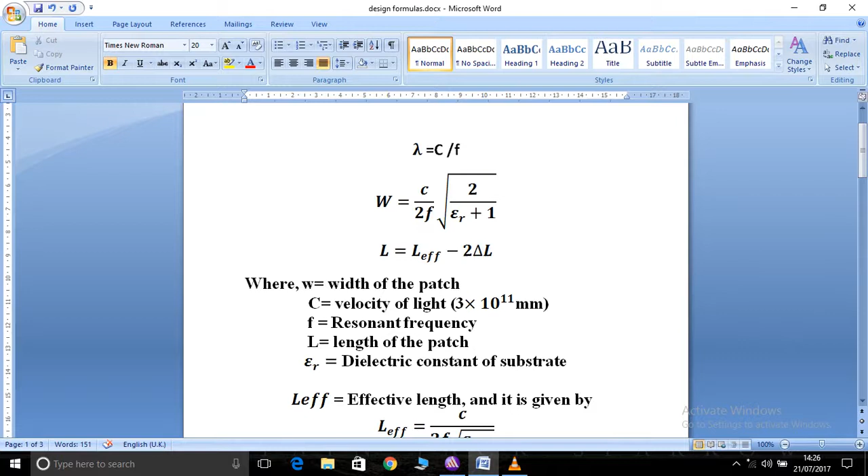Step number two is the width of the patch, where W is equal to c by 2f root 2 by epsilon r plus 1, where epsilon r is the relative permittivity of the material that you have chosen. Step number 3 is the length of the patch, where L is equal to effective length minus 2 del L, where del L is the extension length.

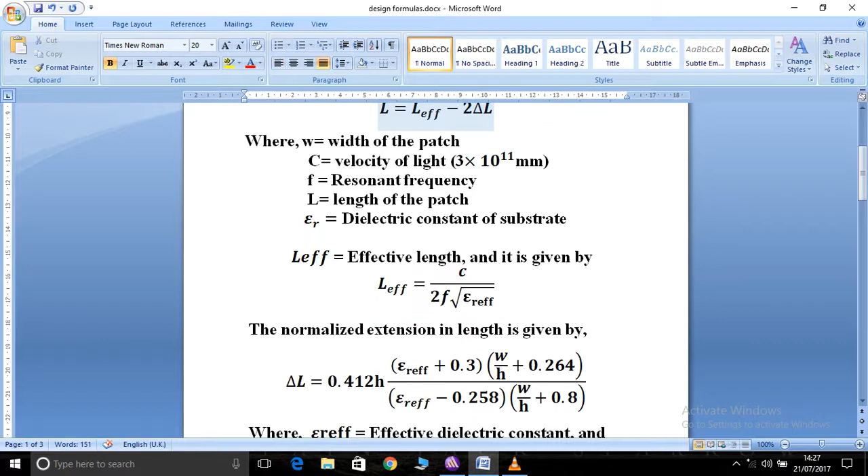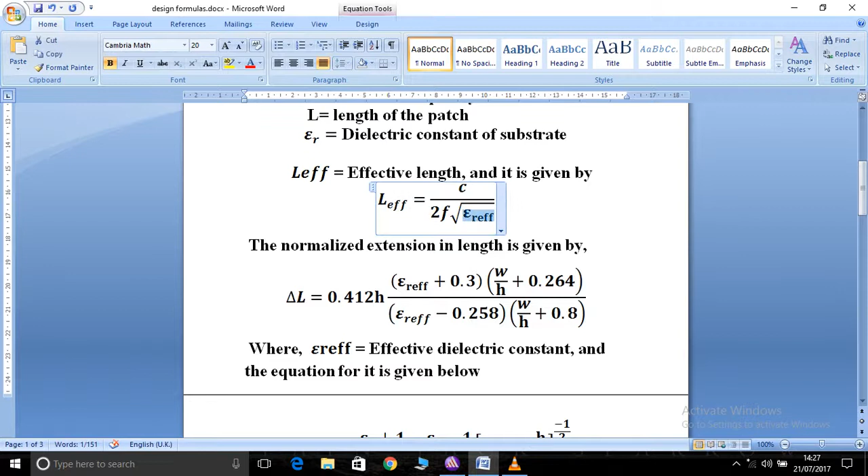Since we do not know these two, we have separate formulas for them, where L effective is equal to c divided by 2f root epsilon reff, where epsilon reff stands for effective dielectric constant. We do not know this either, so we have another formula for epsilon reff, where epsilon r stands for the same relative permittivity, h stands for the thickness of the material that you have chosen, and W stands for the width of the patch.

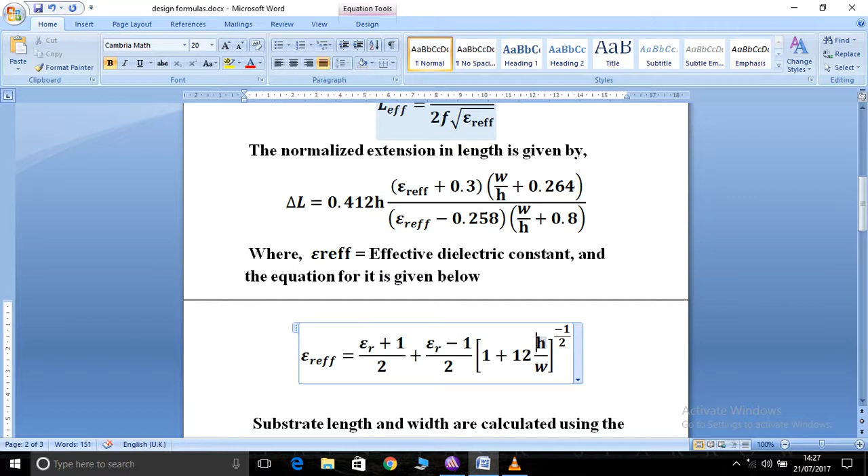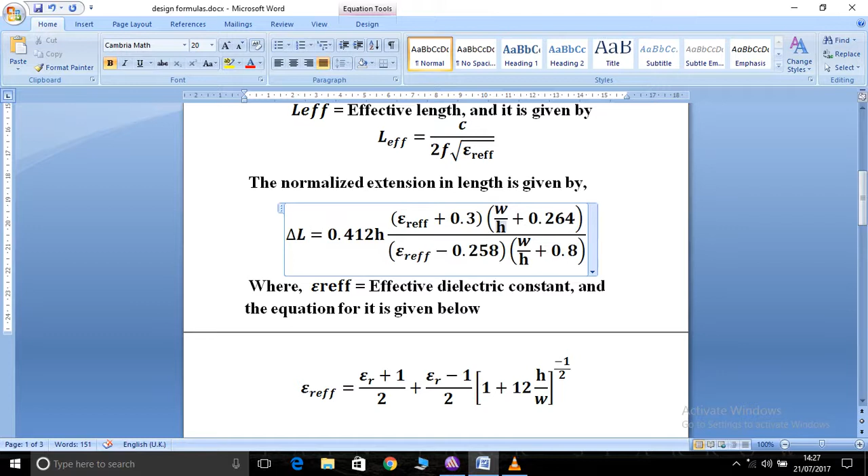And the next thing is del L, that is the normalized extension in length. For this we have a separate formula, using the epsilon reff we have found, where W is the width of the patch and h is the thickness of the material. Okay, so we have found the length and width of the patch.

Next thing is substrate length and width. In order to find them, these are the two equations that we are going to use, where Lg is the substrate length or ground length, equal to L plus 6h, where L stands for the length of the patch. Here h does not represent the thickness; for h we have a separate formula: h is equal to 0.0606 lambda divided by root epsilon r. We already have a formula for lambda from step number one, so that can be used here.

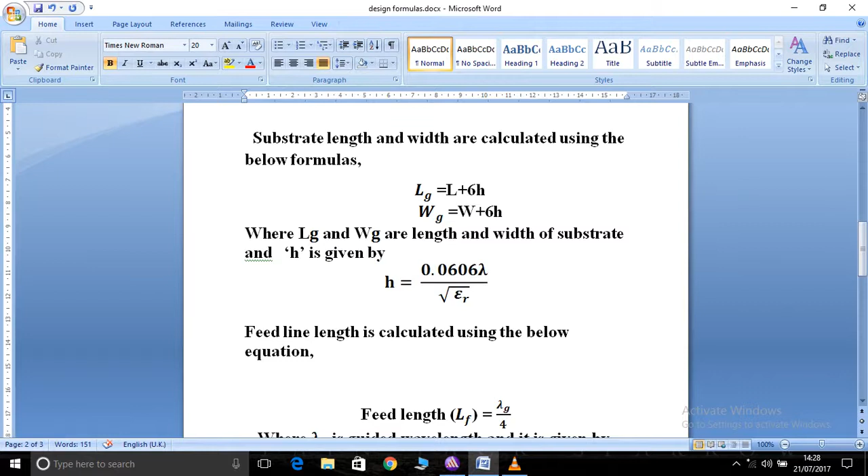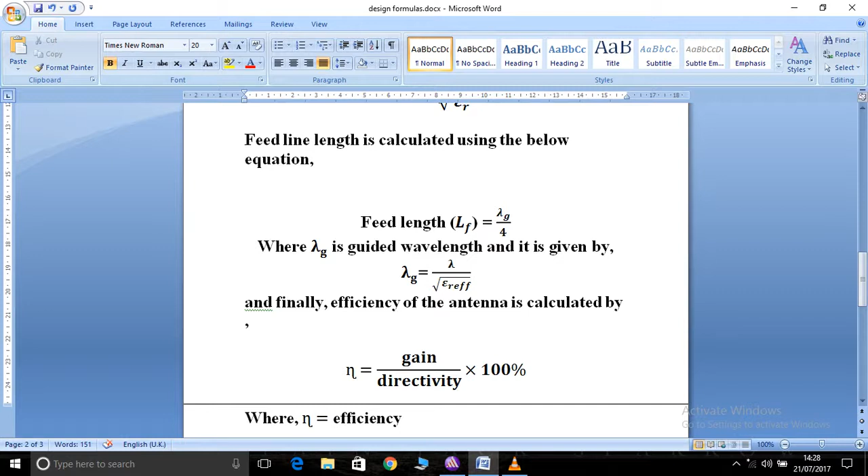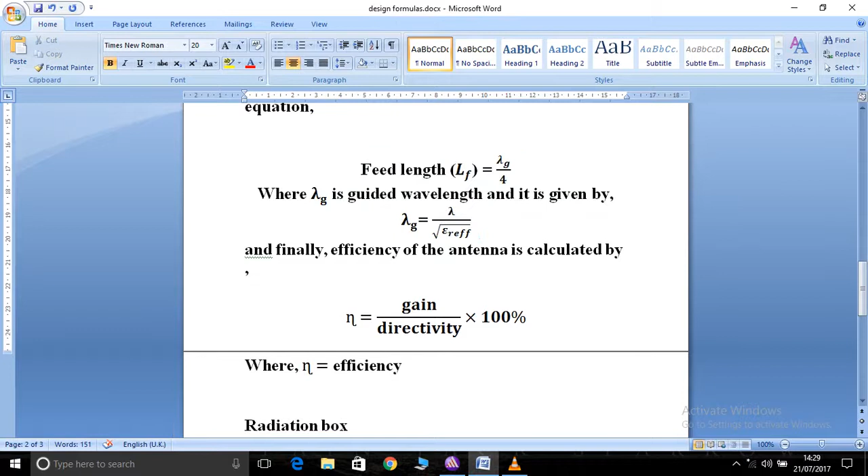And the next is feed length, that is the transmission line, equal to lambda g by 4, where lambda g stands for guided wavelength. For guided wavelength we have a separate formula: lambda g is equal to lambda divided by root epsilon reff. We have already found epsilon reff, so we need not worry. So this is the feed length, and for the feed width you can take half of the feed length. Next, these are the equations for the radiation box: axis position, length, width, height.

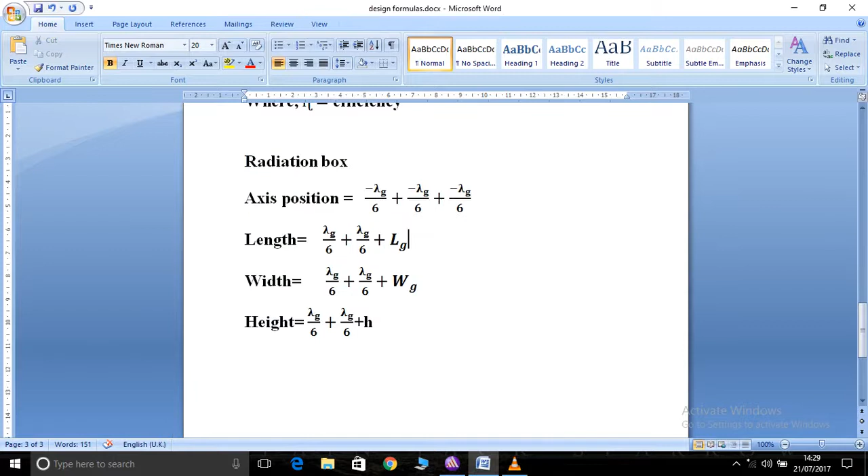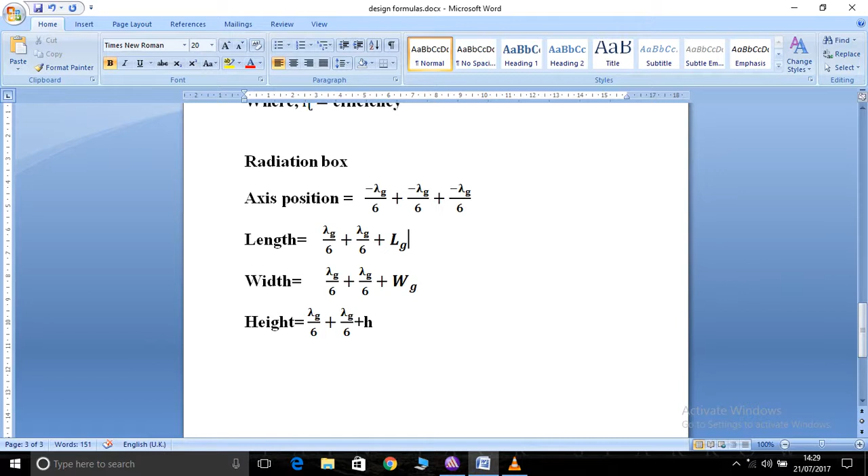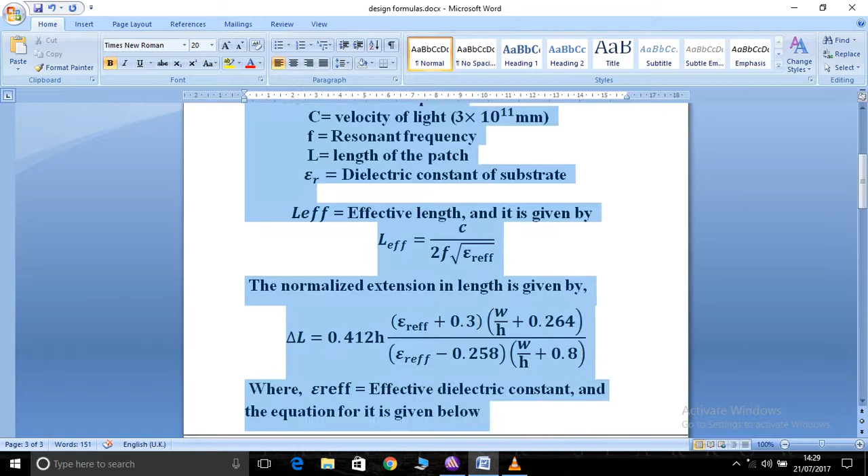For length alone it is lambda g by 6 plus lambda g by 6 plus Lg, where Lg is substrate length. And for width alone, instead of Lg we'll be replacing with Wg, that is width of the substrate, and for height, instead of Lg and Wg you will be replacing with H, that is thickness of the material. And that's all. These are the standard equations that are being used in order to design a microstrip patch antenna. For any design you can use these design equations.

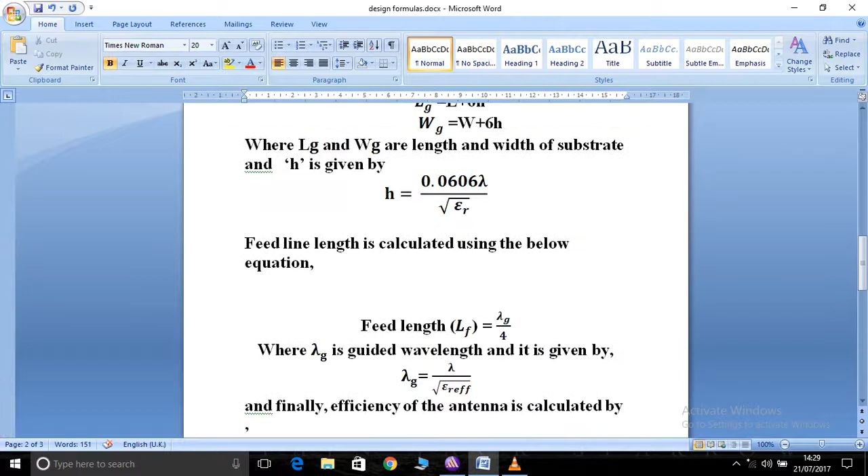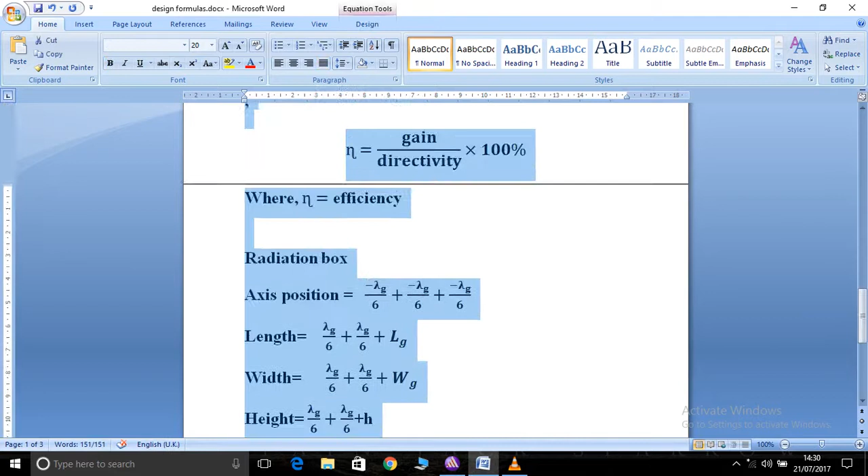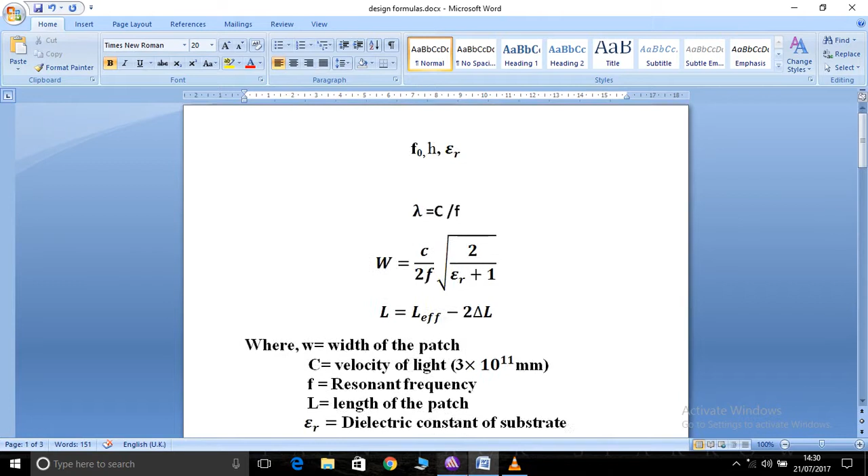So with a design example, I'll show you whether the antenna is resonating at a particular frequency or not. And nowadays the antennas that are being used practically should be of a miniature size. So I'll be designing an antenna at 15 gigahertz, so that we'll have a miniature size, that is 0.8 centimeter. Okay, I have already designed that antenna. I'll just show you the result and the values that are obtained by equations.

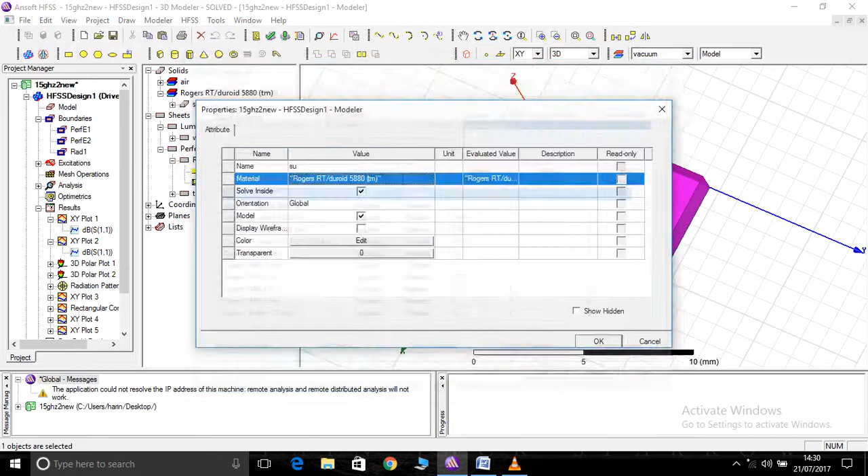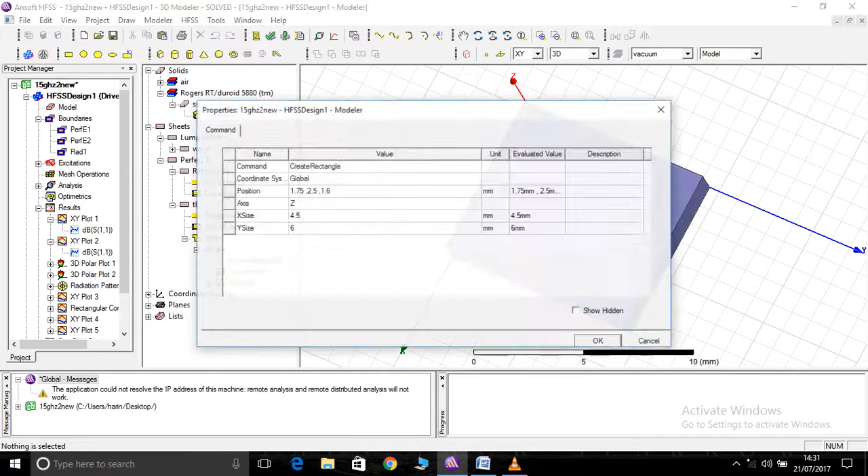And the material that I have chosen is Rogers RT/duroid 5880, for which the relative permittivity is 2.2. That 2.2 has to be substituted here, where C by 2F, that is C by 2 into 15 gigahertz, root 2 divided by 2.2 plus 1. So with that you will be able to find the width of the patch. So using that, I have found the width of the patch is 4.5 and the length of the patch is 6. So for different types of frequencies you can use these equations.

Okay, next, substrate length and width. Using those equations I have found that substrate length is 8 and width is 9.5, that is 0.8 centimeter and 0.95 centimeter. So it is of a very miniature size. And then feed transmission line, the length that I have found is 3.2, and the width you can choose as you like. You can analyze by giving different widths, so that at whatever width you find the better result the antenna can give, that width you can consider.

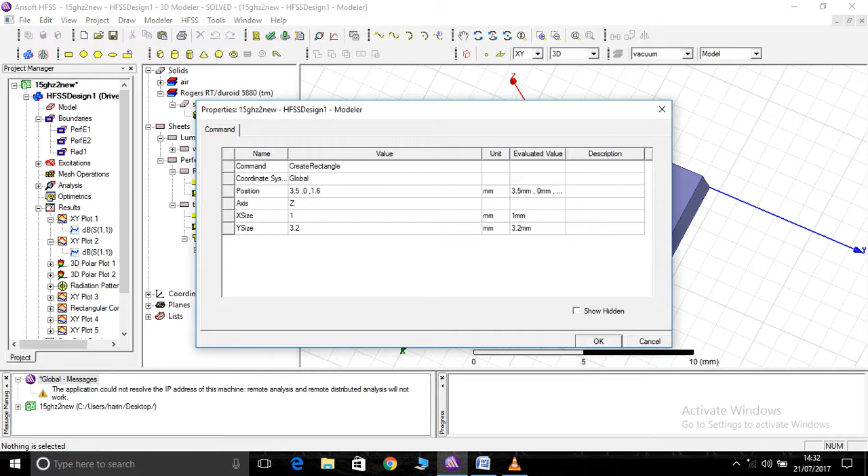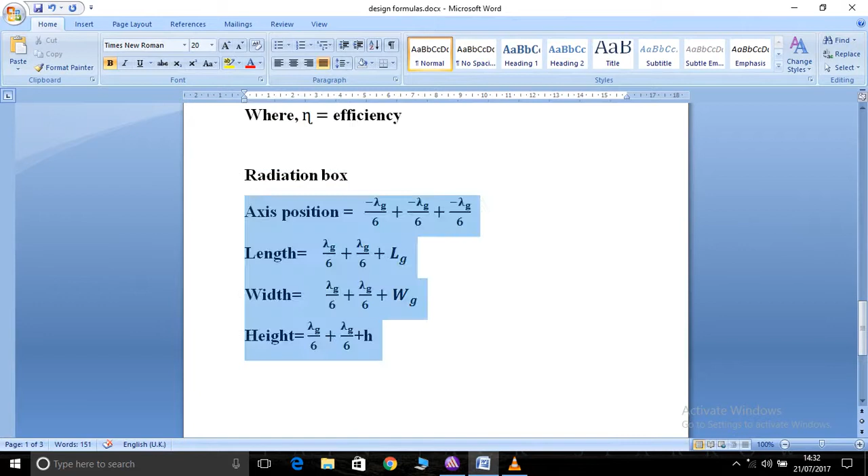Okay, that's all. And here in this design I have used inset feed, because when you use the inset feed there will be a proper impedance matching, so I have used inset feed. And these are the equations that you will be using for radiation box axis position. Lambda g is guided wavelength that we have already found, minus lambda g by 6 plus lambda g by 6. With that I have found axis position as minus 1.7, minus 1.7, minus 1.7, and the length, width and height 11.4, 12.9, 4.5.

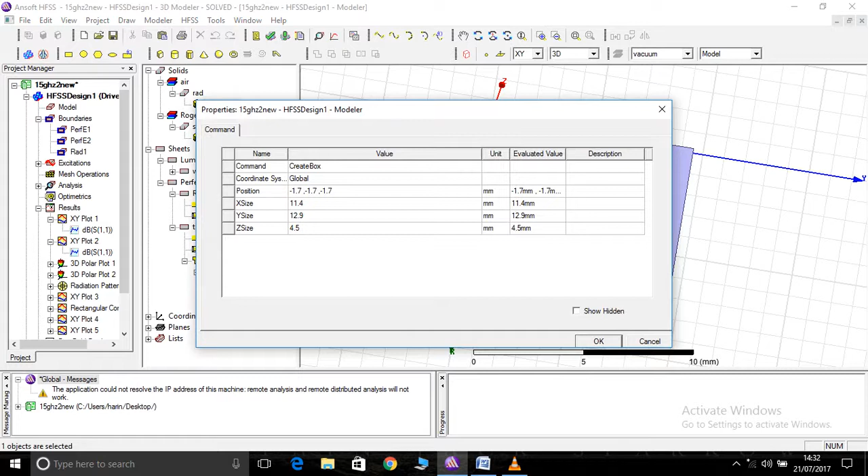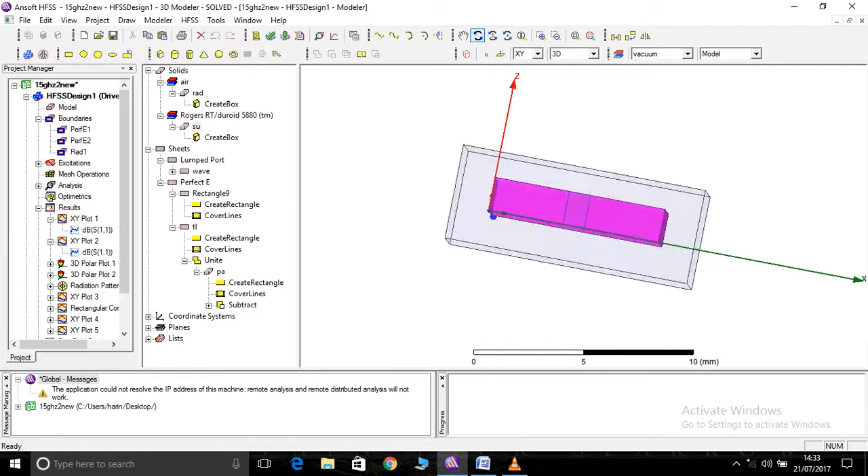So when you use these equations for radiation box, you will find that your antenna is placed exactly at the middle of the radiation box. See, you can see that your antenna is exactly at the middle of the box. Okay, that's all. We'll run it and see whether the antenna is resonating exactly at 15 gigahertz with better return loss and good parameters. Okay, it's validated. We'll right click.

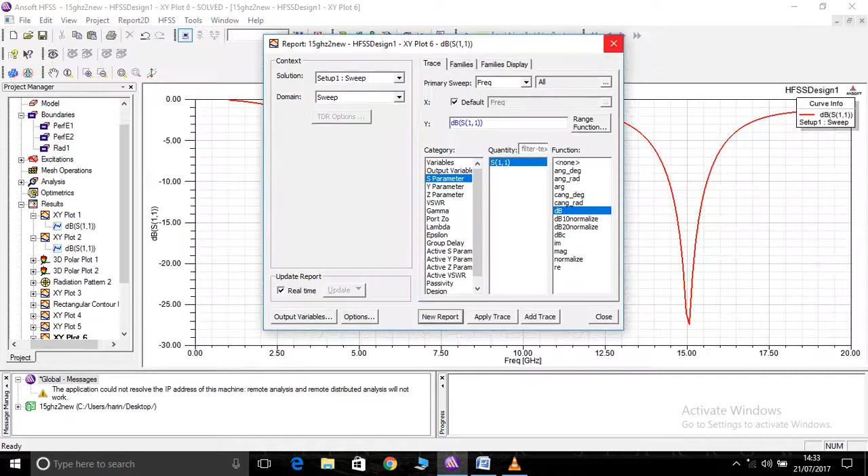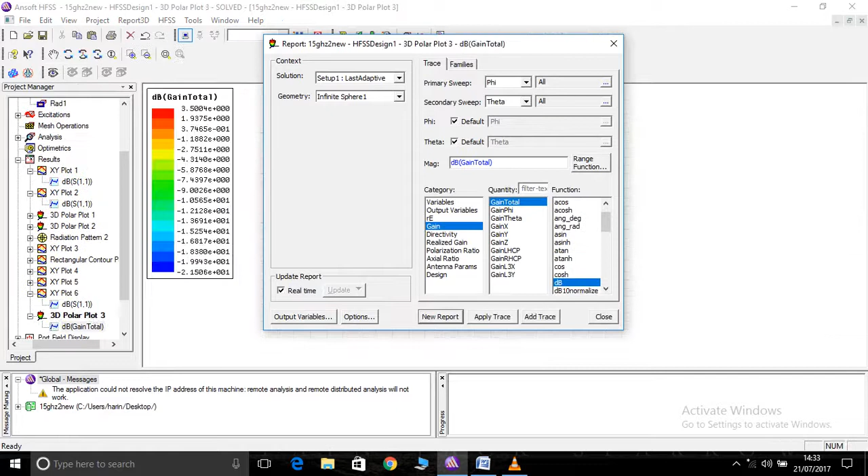Super. You can see here antenna is exactly resonating at 15 gigahertz. 15.06, 0.5 more or 0.5 less, it's not considered. Then we'll find the gain, create far field report, 3D polar plot, gain dB. Okay, fine. 3.5 is the gain of this antenna.